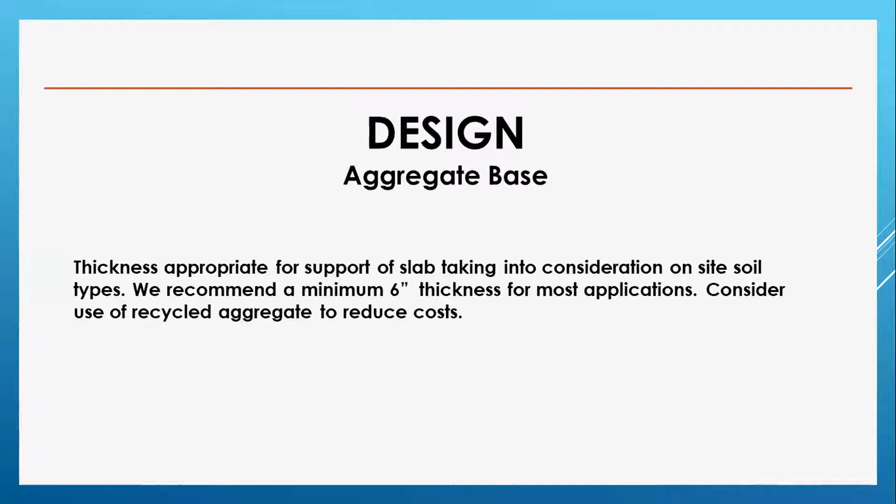Wanted to talk briefly about aggregate base. My take on aggregate base is we recommend a minimum of 6 inches under most applications. We recycle aggregate here at our facility, and so we promote the use of recycled aggregate. We actually install over 100,000 tons of recycled aggregate under our pavements every year, and we've never had one issue with warranties or failure from the aggregate base that we use.

Under drains in parking lots are huge. We're a firm believer in using under drains to keep the soils dry and the stone base dry. At a minimum, we'd like to see in design at least finger drains coming out of all drainage structures. It really helps after a rain event during construction—the site dries a lot faster. After the concrete or asphalt pavement's installed, it keeps the water from pooling around the drainage structures and keeps the stone base dry, free of water. So once we hit freezing temperatures in the winter, the pavement doesn't heave and shift around because of the freeze-thaw cycle. While you're designing parking lots, please keep in mind to include some under drains and under slab drainage.

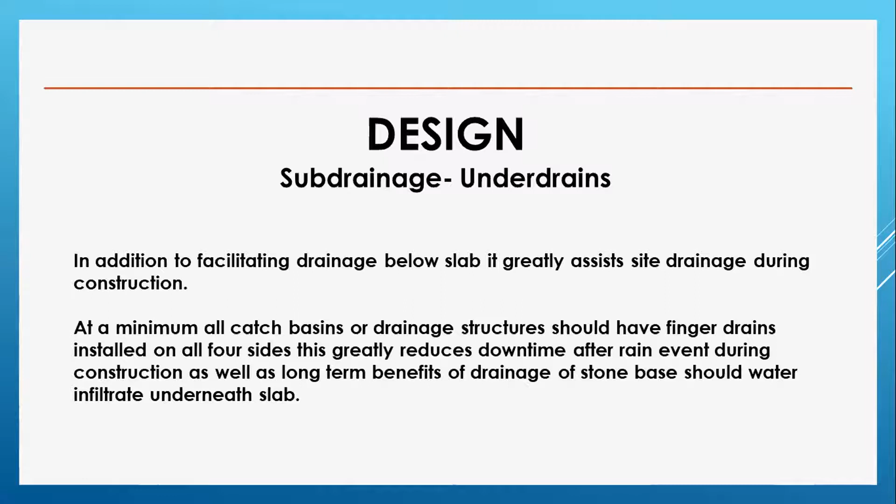Talk a little bit about reinforcement. As a contractor, we try, when we can, not to use wire mesh and rebar, for several reasons. Typically it's installed incorrectly because many contractors fail to use the chairs and slab bolsters to keep it at the right elevation in the slab or pavement assembly. It also adds cost during construction—when we use steel, we often have to pump the concrete into place, which adds additional cost. There's the time installing the steel, and working with the steel while installing is dangerous. Unloading it is dangerous, it gets bent up and deformed while we're moving it around the job site, and we have problems with steel sticking out of the slab because it's bent. The guys placing the concrete trip on the mesh and the rebar, causing a lot of injuries. So for safety reasons, we have to be very careful working with wire mesh and rebar.

We promote the use of fibers when we can and have really good success with macro fibers. We've used macro fibers in some really heavy duty applications, and we've had incredible results with them.

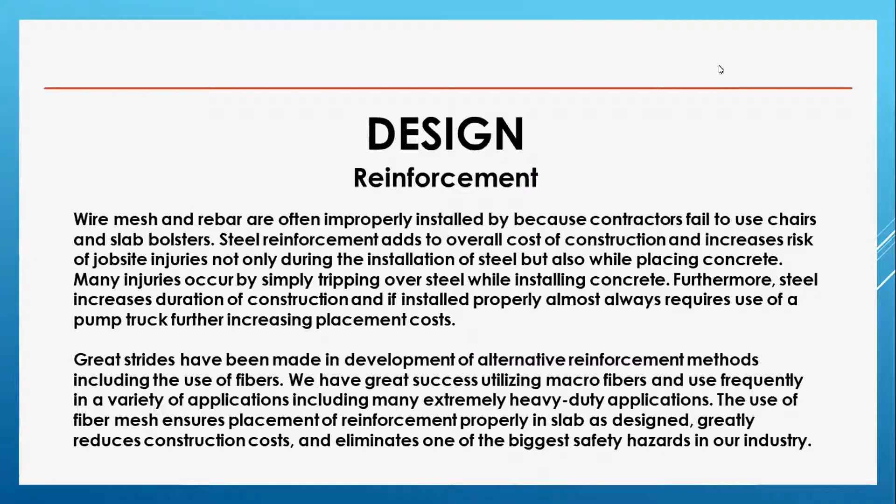Here's a picture of a parking lot we installed last year for Cuyahoga Valley National Park. It's actually an RV parking lot, and as you can see, we're utilizing a pump truck. We used 78-pound mesh on this project, chaired up about 6 inches into the slab, which was an 8-inch thick slab.

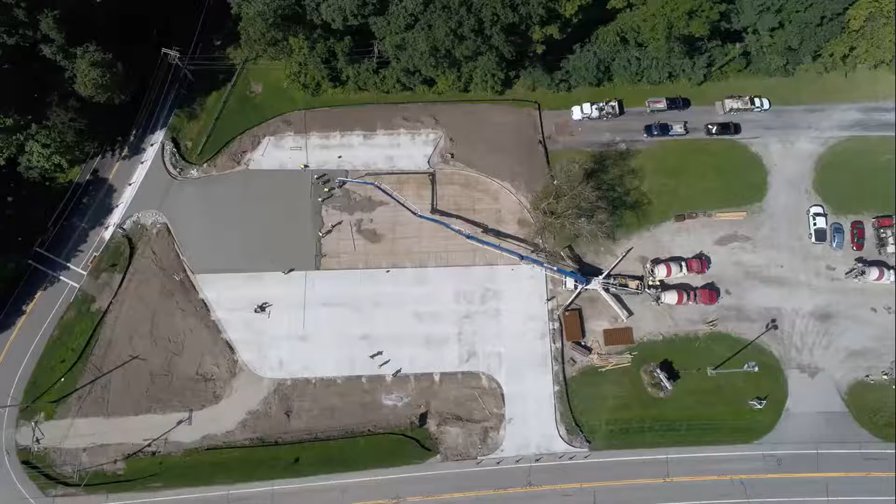Talking more about design and pavement grades, we're increasingly seeing parking lots and roads designed with not enough slope to facilitate drainage. Anytime you can get more than 2% slope, minimum 2% is what we need. We're imperfect as installers, and we have bull float marks and knee board marks, imperfections in the surface as we're finishing, and with less than 2% slope it makes it really hard for us not to have puddles and bird baths.

One of the most important things in recent years is ADA and path of travel requirements. This year, I'd venture to say we've done 25 to 30 retrofits to existing parking lots because the ADA parking spaces and the path of travel entering the building did not meet code, and there are litigious attorneys now running around businesses with levels trying to find when a business is out of compliance.

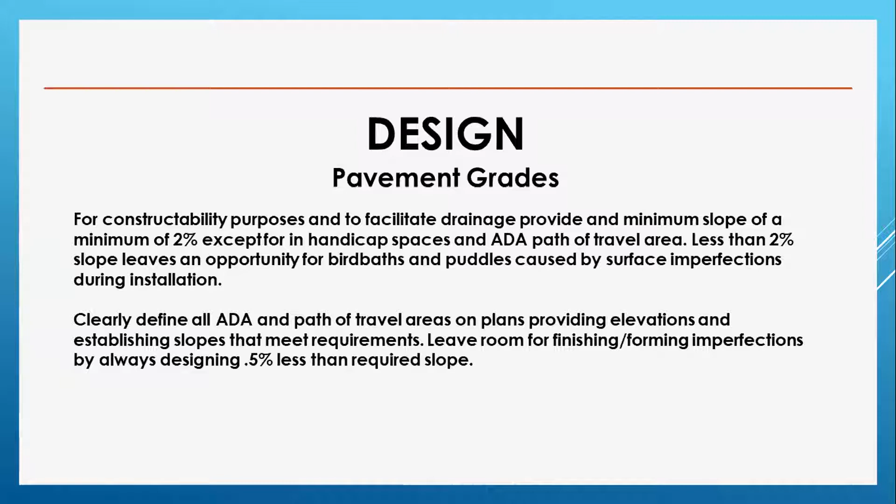So we typically, whether we design the parking lot ourselves or not, substitute concrete for asphalt in the ADA area. It's easier to hold the standards you need for elevations when pouring concrete there - straight edging from form to form, having time to set up your forms and double check the percent of slope in those areas.

It's really important for us as contractors that designers include a clear drawing detailing the handicap ADA areas, showing us the slopes and clearly defining those. This is a good example of a well-defined ADA area. So please, when designing parking lots, or if you have a project that isn't clear, get clarification from the designer - get a plan, a detail.

This drawing here is excellent. It leaves little room for error.

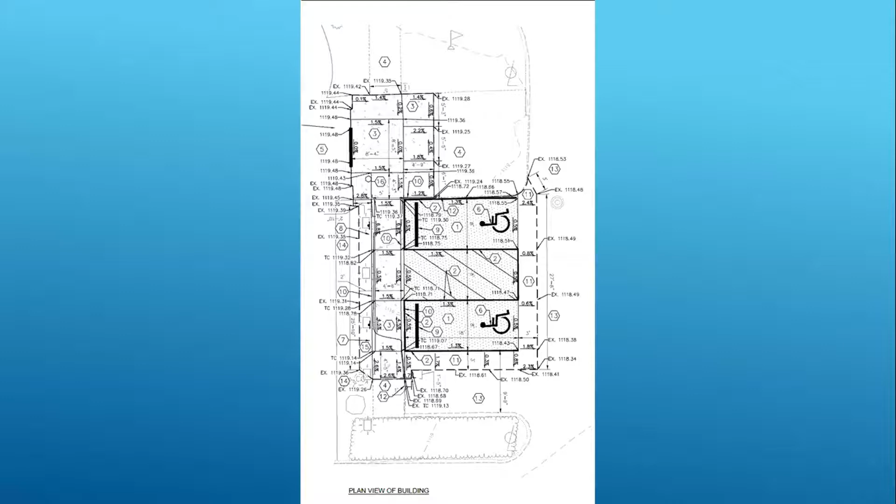One thing I wanted to talk about today - it helps save costs and improves efficiency and time while installing a parking lot. If curbs are desired or required, we really like to see the use of integral curbs in concrete parking lots. It helps reduce construction costs - you're only bringing one crew in, installing the curbs at the same time as the rest of the pavement, which really helps with time and costs.

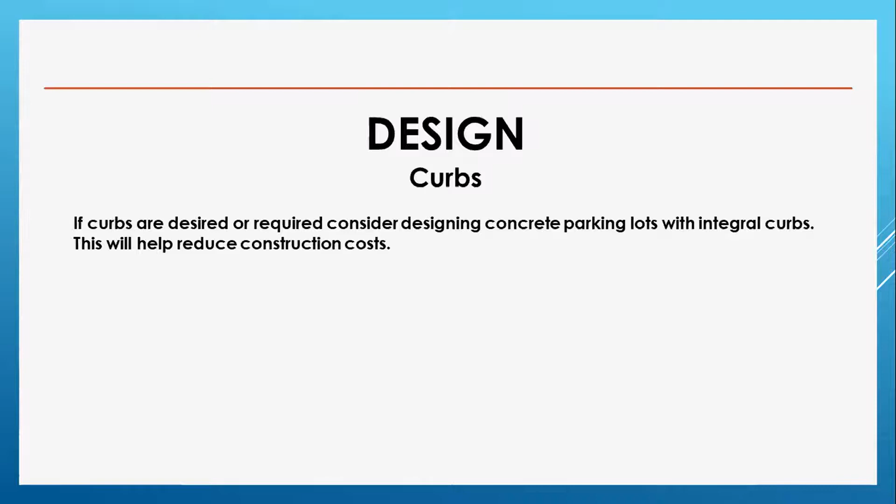Talking a bit about construction - as we start a project, we typically have it surveyed, then excavate the site to subgrade depth. Once excavated, we compact the soil and always engage a third-party testing inspection agency to evaluate a proof roll that we perform with a tandem axle truck, 60,000 pounds gross vehicle weight. For the proof roll, we roll it back and forth across the subgrade slowly and watch for deflection in the soils.

If it's unsuitable, we defer to the third-party testing agency for recommendations on how to remediate the soil. I always like to have the owner or an owner's representative on site during the proof roll, so they can witness for themselves if the soils aren't up to standard, and understand why there's additional cost involved to remediate the soils.

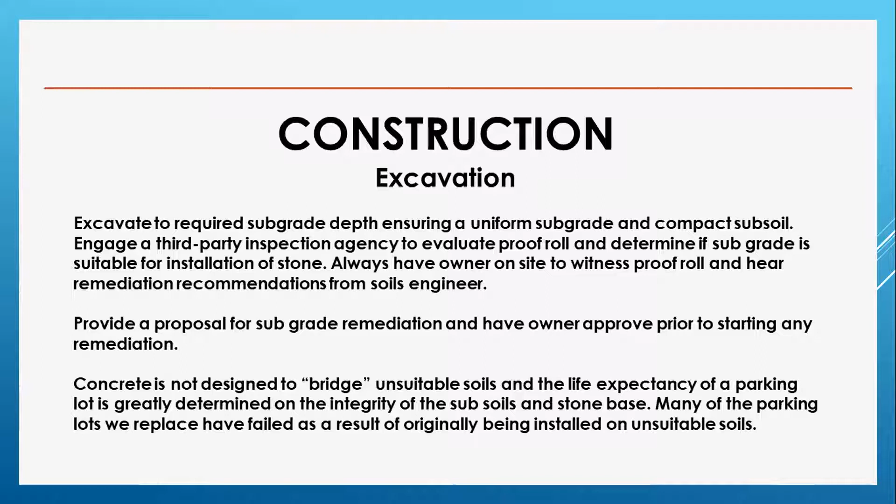One of the things that helps our company be so efficient with parking lots is our forming and prep. We put a lot of time and energy into the work before the crew shows up to install the concrete. We always double check our elevations, even double check the surveyor's elevations, and make sure we have enough slope for proper drainage. Again, we check the ADA areas and the path of travel time and time again.

To tell you how hard it is to meet that tolerance, I typically set our sidewalks up for 1.5% cross slope in the path of travel, and we set the forms at 1.5%. Recently I was on a job and I was checking behind the guy bull floating the sidewalk behind the straight edge, and just the simple act of bull floating the slab was enough to take it out of tolerance. Even though the forms were 1.5%, the dip in the bull float brought the cross slope to 2.25%. So it's really important to check, double check, triple check the forms.

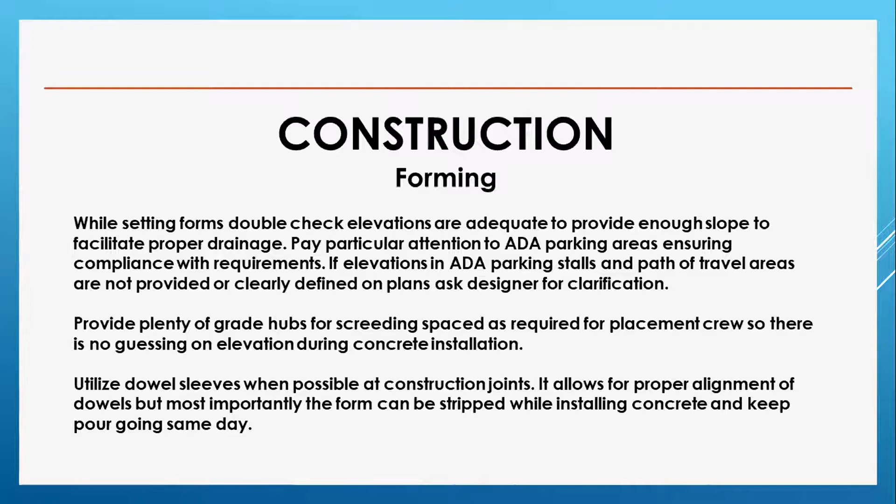We use dowel sleeves whenever possible at construction joints. They allow for the proper alignment of the dowels in the slab, but more importantly, we're able to strip those forms as we're pouring and keep installing concrete that day, so we can keep a continuous pour going. There's a picture of one of the types of dowel sleeves we use. You can see the dowel sleeves actually stay in the pour once we strip the form.

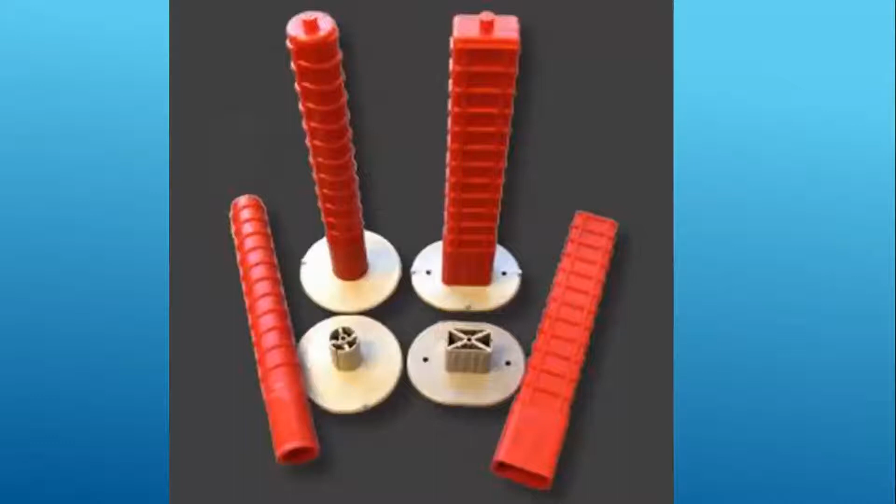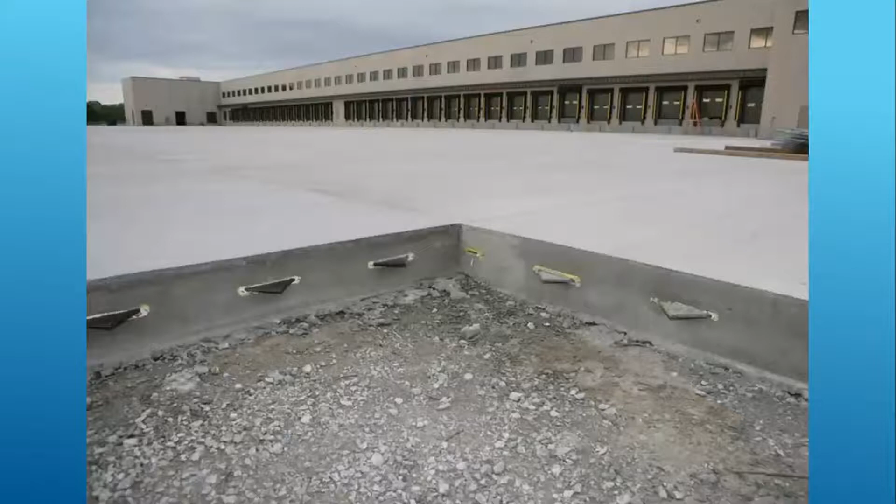The expansion joint that's showing there looks wavy, but it's actually recycled rubber. We like to use recycled rubber expansion joint. It doesn't rot away and leave a void, a big crack in the parking lot. Another picture, the base screws to the wood forms. And then again, the dowel sleeve itself stays in the concrete. These are called diamond dowels. We also use those, same concept.

Going back to the grade hubs, we like to space those out around 16 feet apart so that we can establish screed guides. We use a 3D laser screed often when we're installing parking lots, and we actually put a grade hub at all elevation breaks, peaks and valleys. I would say 25 foot apart when we use a laser screed. The laser screeds have a total station system. So they actually go out on site, set up their laser, and then go around and shoot the top of all the rebar grade hubs that we pound in the ground. Once that data is entered into their computer on the laser screed, we simply remove the grade hubs.

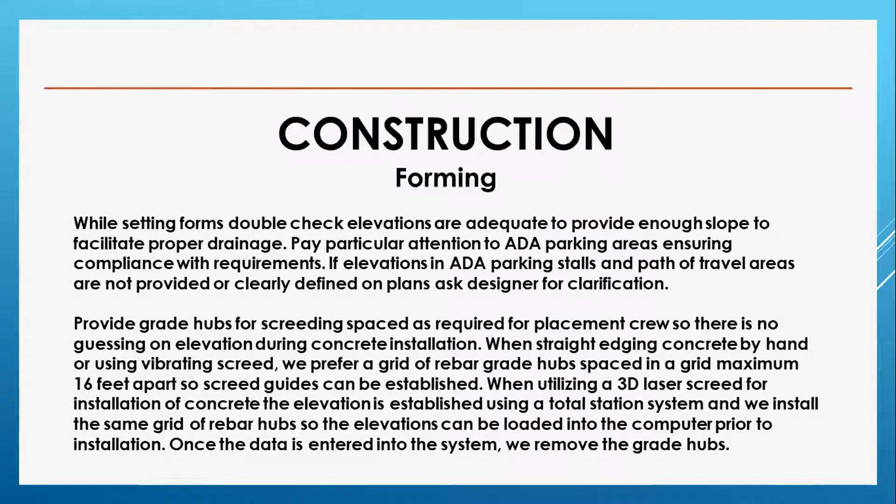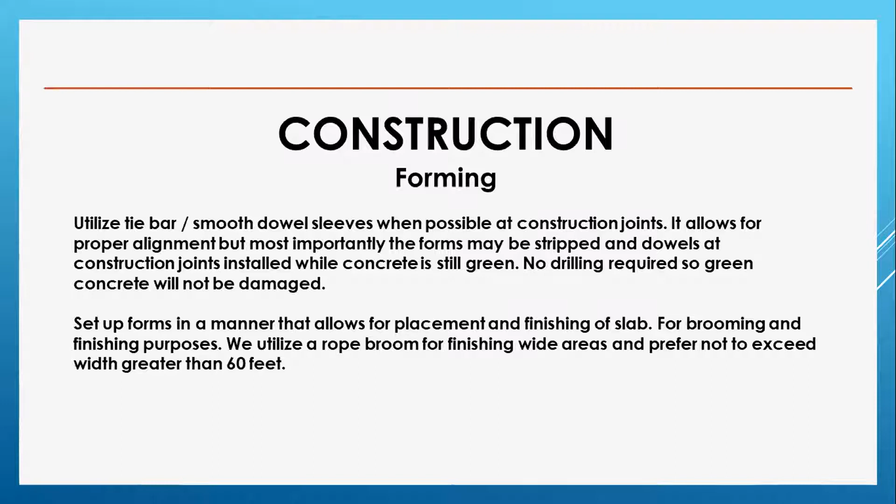One of the challenges as we're installing a concrete parking lot is that we need to keep the widths to, I would say, no greater than 60 feet. That allows us to place the concrete and keep from getting cold joints. It also allows us to finish the concrete. Any wider than 60 feet, it becomes really tough to get a broom finish on the concrete. We actually use a rope broom for finishing the concrete. We'll have two guys standing outside either edge of the pour, edging, bull floating, and pulling the rope broom across.

Communication with the ready mix supplier is one of the most key factors for a successful installation. It's actually key for our operations on a day-to-day basis. We're in constant communication with the ready mix producers every day, multiple times a day.

When you're planning a concrete pour, they need many days ahead, at least a week ahead of time. They need to know that pour is going to be happening and what day the pour is going to be happening. They need to know the quantity that you need that day, and they need to know your production rate.

For instance, if we're using a laser screed, I typically will place 90 to 100 cubic yards an hour. It's hard for a plant that typically produces 1,000 cubic yards a day to keep up. It almost takes every truck that they have, depending on the proximity to the pour, how far they're trucking it. So ahead of time, it's really important that we communicate with our ready mix producers.

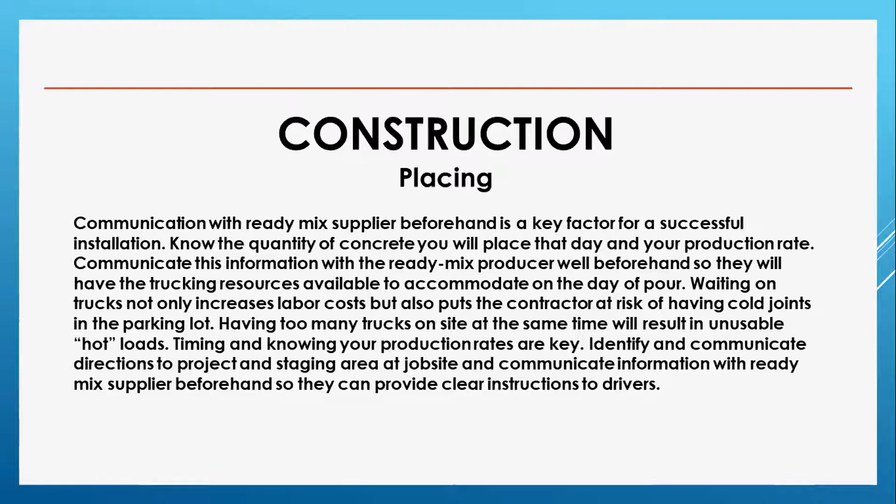Again, this was a smaller pour, smaller installation. It might have been a 220 to 250 cubic yard parking lot, but it took us approximately 4 to 6 hours to install, and we did it all by hand using vibrating screeds, and it went really smooth.

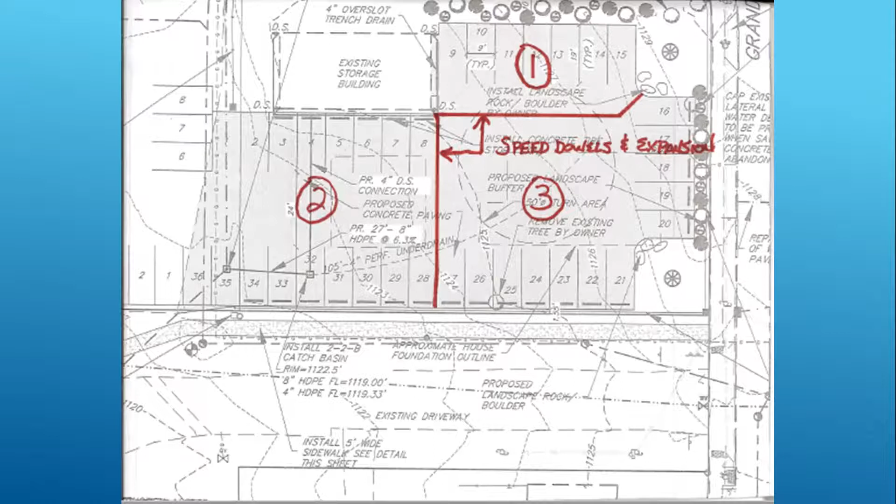You can see the form line for area 2 there. I can use your mouse. I don't know if that works. Oh, yeah.

There you can see the form line for area 2. We were able to start back here and work our way back down, and by the time we got to here, strip that form and insert our dowels.

We like to provide a really nice washout area. A lot of contractors don't think about this beforehand. It's really important to identify that area. You want to be able to get 2 trucks up to your washout at the same time. The quicker we get those trucks back on the road, the quicker they're back on your job with concrete. So it's very important to have an efficient washout area and keep those trucks moving.

You want to sequence the installation of the pour to allow for continuous installation. Again, we recommend 60 feet wide. We utilize super plasticizer on a daily basis to achieve workable slumps in lieu of adding additional water. If you're specifying projects, I recommend maybe even adding that to your specification, the use of super plasticizer to achieve slumps.

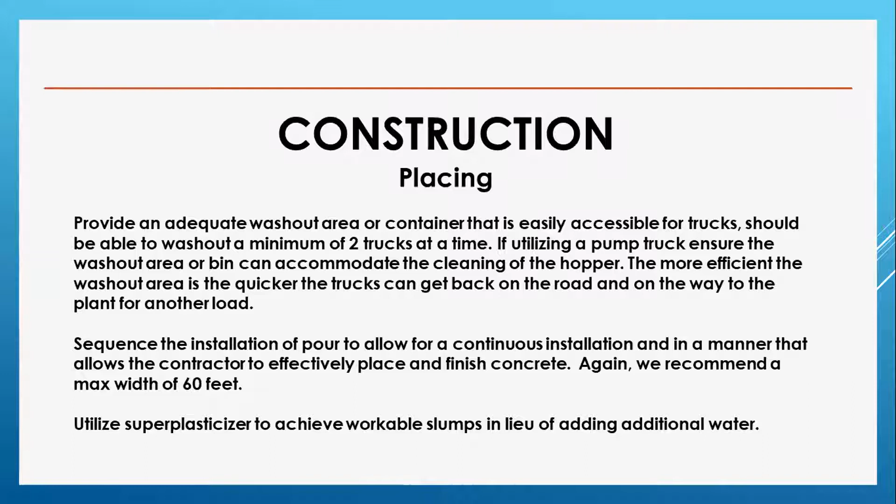Manpower. The worst thing you can possibly do when you're doing a large concrete install, that leads to some of the worst days of your life, is shorthanding your labor. You always want to plan for the worst case scenario and have your labor scheduled accordingly. We love to cure right behind our brooming operation, and we make sure that we provide adequate coverage of the cure. It's cheap insurance, very important for the longevity of the concrete.

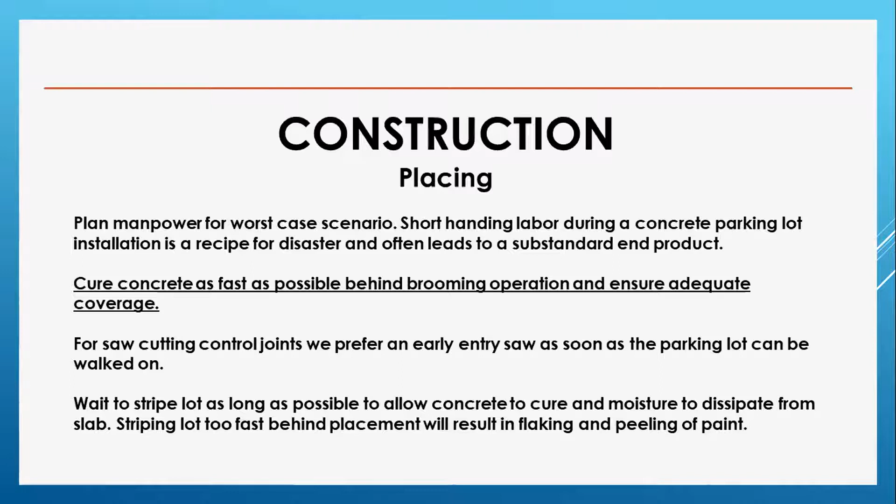We always use an early entry saw when we can in our pavement, and we get on it and start cutting it just as soon as we can walk on it. Waiting to stripe is sometimes hard to do because owners want immediate possession, but we encourage waiting as long as possible to stripe the concrete, allow it to cure and the moisture to dissipate from the slab so that the paint doesn't peel and flake prematurely. That's one of the issues that we actually see in concrete parking lots a lot, that they're often striped way too soon after the concrete's placed.

When Bob introduced me, he said our company is Perrin Asphalt and Concrete, and we do equal amounts of asphalt and concrete, and oftentimes I'm asked, why would you go with a concrete parking lot in lieu of asphalt? Isn't asphalt cheaper? Not necessarily. I would like to think that any lot 5,000 square feet or less is going to be definitely cheaper to do in concrete than it is asphalt. The cost of an asphalt paving equipment crew is probably around $1 million. The cost of equipment that we need to install a concrete parking lot is less than 50,000. Big difference in cost of equipment, overhead costs.

Parking lots, we're going to talk about integral curbs again. Parking lots that are designed to have curbs. If you can do a concrete parking lot with integral curbs, that saves not only grading time, it also saves time with the installation of the parking lot. Typically, if it's an asphalt parking lot and we install a 6x18 curb, you achieve subgrade, you install the stone for say your 6 inches of asphalt. So you would have to go back and excavate a slot for the installation of the curb. Then we'd bring a crew in and install the curb.

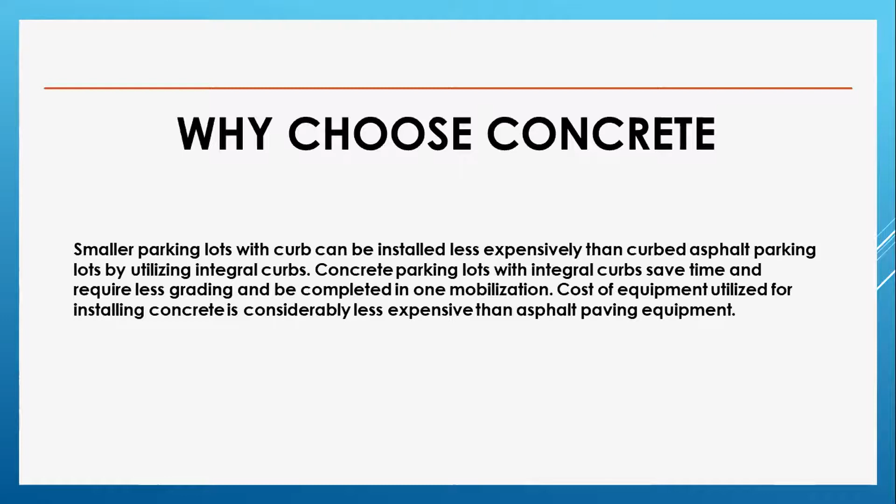Concrete's virtually maintenance free. We all know that it has a greater life cycle. Asphalt parking lots require maintenance, crack filling, seal coating, restriping. Asphalt parking lots are hot in the summer. They really produce a tremendous heat island effect. So a concrete parking lot actually decreases your cooling costs for the buildings, and concrete parking lots require less site lighting because they're brighter.

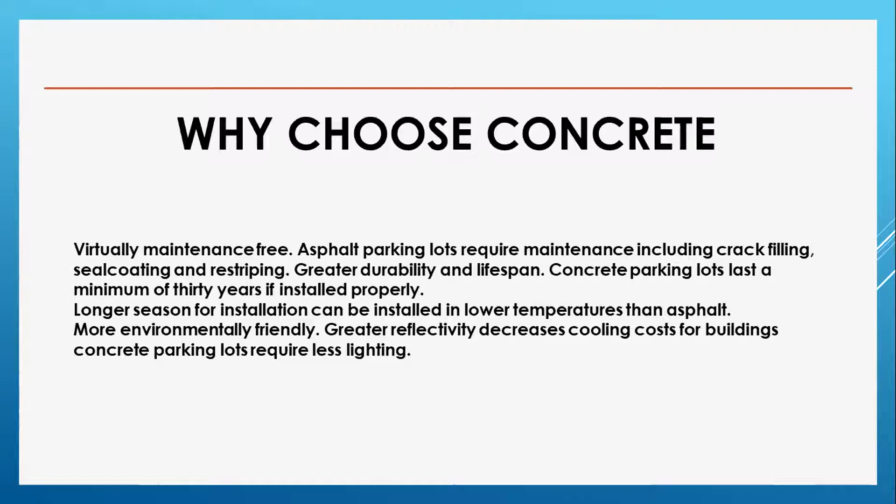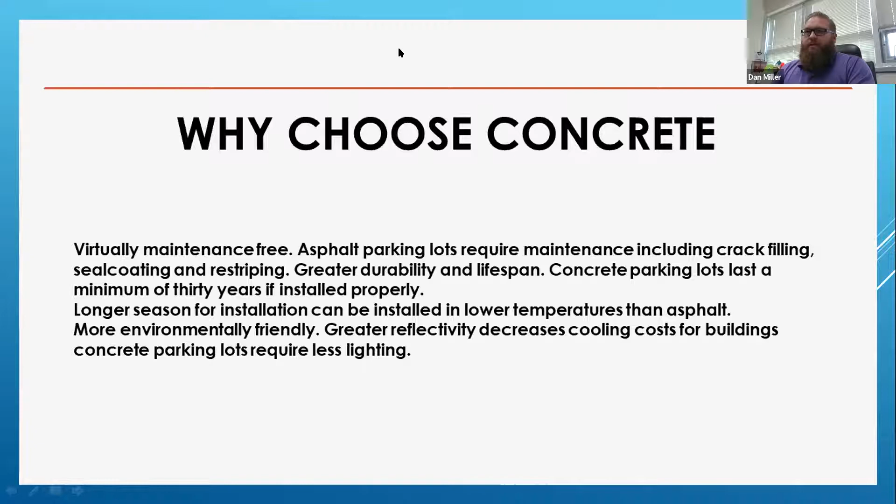Great, thanks, Wayne. Appreciate everybody here today for the webinar. Good presentation from Mr. Dan King there for pavements. For me today, what I'm going to touch on is ODOT specifications. Let me share that, sorry about that, wasn't fully sharing. Let's see.

So the specifications I'll touch on today are 451, 452, which is concrete pavement. I'll touch on aspects within 455, which is our quality control, quality assurance section. Got a few key details that I always like to touch on whenever I'm presenting a webinar or giving a talk of any sort. It's beneficial for everyone to see. Touch on some items within item 499, which is our ready-mix concrete, along with supplement 1126, which goes into the more important portion and aspects for the ready-mix supplier on how to obtain a JMF approval and what's required there.

And mainly for this topic, I'm going to touch on the self-consolidating concrete aspects there. Touch again on 499.05.D, the new spec for volumetric trucks and what we're going to allow with those. And then lastly, 705.29 for a spec item for fibers in concrete.

For 451 and 452, we do have the new mix designation, which is the QC1P. It does still have the 4,000 PSI compressive strength parameter with 2,000 or less coulombs of permeability using the AASHTO T277 test. In doing supplement 1126, this would require an AASHTO accredited lab and the ACI 301 over design of 5,200 PSI.

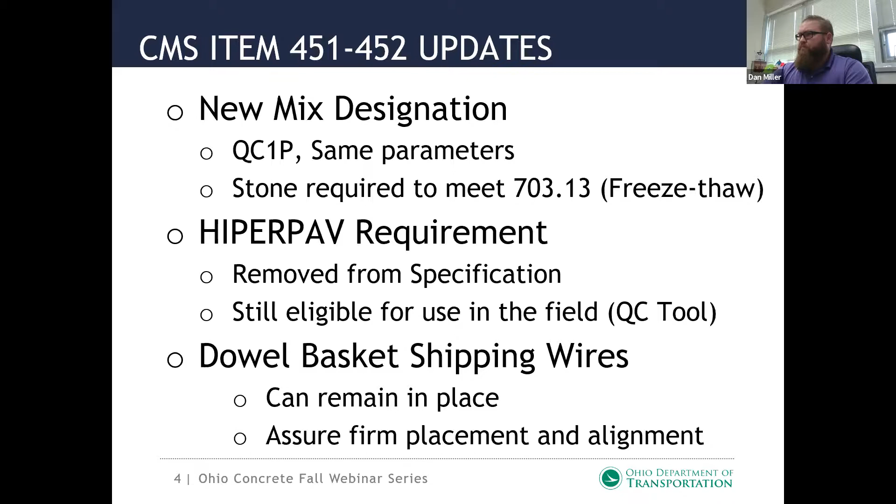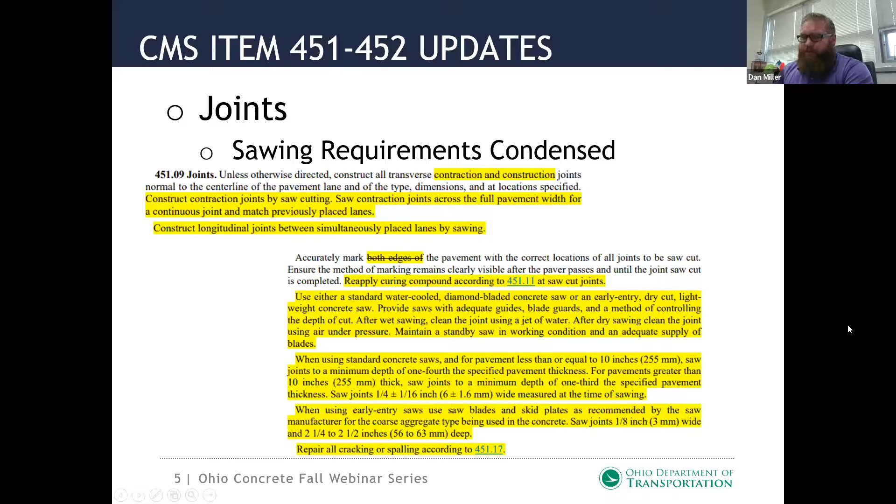There are still some minor details that were there, but instead of repeating the same language over and over again about what types of saws to use and what depths we need to cut to, we've brought that into one section. That way it makes it easier to read the specification, and we can keep going throughout the spec and capture different details. And for those printing the book, we're possibly making fewer pages, and sometimes they like that.

One item with this is currently in our specs, we do still require ASTM C143, the slump test. We highly recommend not going with the eyeball approach. If folks in the field decide to just eyeball this slump today and call it a 3-inch slump, that is honestly the best way to falsify something if we record that value. So I would recommend not doing that, as that may cause issues down the line that may involve the Federal Highway Administration coming out to do checks, and may lead to further actions if we find a lot of eyeballing. Please be mindful that the slump test is still required to be run by the contractor and also by the department.

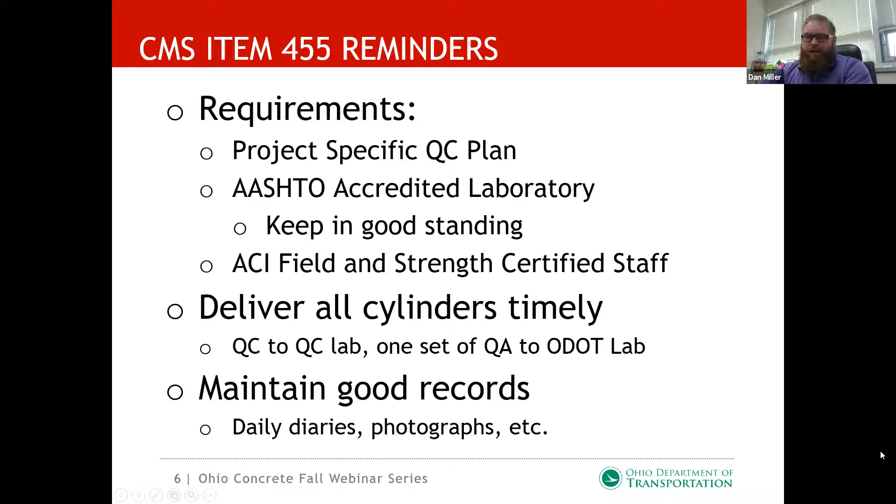CMS item 499, for the spec book 19, the QC1P update. We did also add our self-consolidating requirements. For the SCC, it is our 4,500 PSI, so it is similar to the QC2, with 1,500 coulombs or less for permeability. The main item for the aggregates, however, is it does not have to be well graded. It can be, but if you need a tighter tolerance for reinforcing steel, or there's a decorative feature such as trees or birds, or gentlemen or ladies riding in a canoe, whatever we can dream up with concrete, with SCC we can make it happen. We want to follow the guidance of ACI 237R for SCC requirements.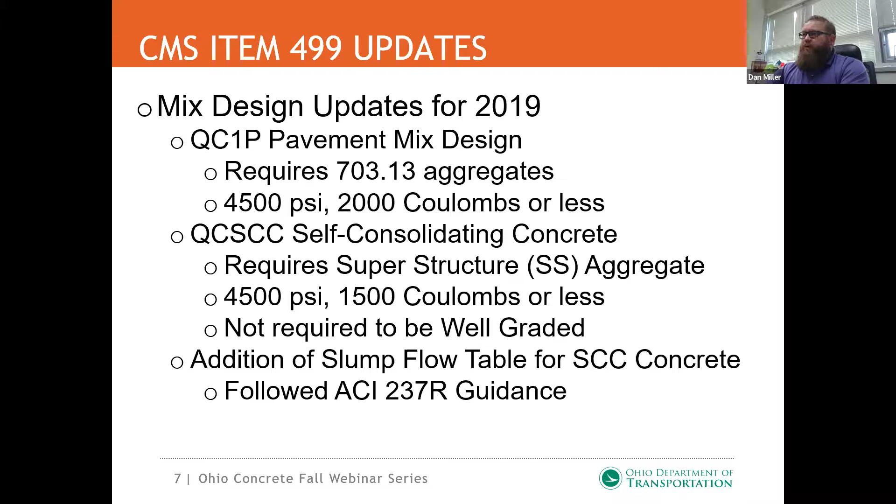We also have different requirements in 499 for the slump flow, with 3 different classes for the slump flow that can be called out by designers. It can be in plan notes, but hopefully designers can start to call these out with the different classes. There are some avenues that I've been addressed on from others in construction that we need to tie this into the spec a little bit more, into our 511 spec and other areas, as to where to use SCC and get the most benefit out of it. I think it's mainly for our decorative areas, for drilled shafts, and situations where we have tight reinforcement tolerances. It's currently used in precast, pre-stress, and concrete pipe industry with great success.

So hopefully we can start using it a little bit more in our day-to-day concrete placements.

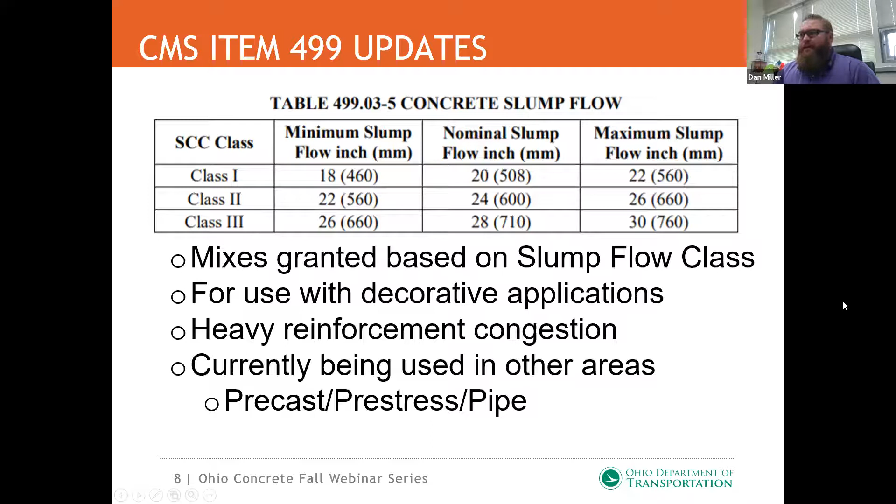For supplement 1126, we do have some different requirements that go along with the SCC mix design. Based on each slump flow, we do recommend having 3 different submittals. So if you want a class 1, a class 2, and a class 3 within your suite of mixes that you can provide to the department, we do ask for testing to be performed at each of those levels.

Testing includes the visual stability index, the J-ring, and also the static segregation test. We understand it's admixtures that are changing here. The recommendation is to go to class 3 and do your permeability and strength testing based on that, and then we can back down from those. The testing lab can provide data for the other 2 slump flow classes and submit that data.

Make sure to include in your test reports the aggregates that are being used, the cement that was used, and the batch weights being used. We need that information. We've been seeing some submittals lately where we're completely missing everything. All we're getting is strength test and permeability test data, and that's not enough to give us anything to verify what materials went into that testing at the lab.

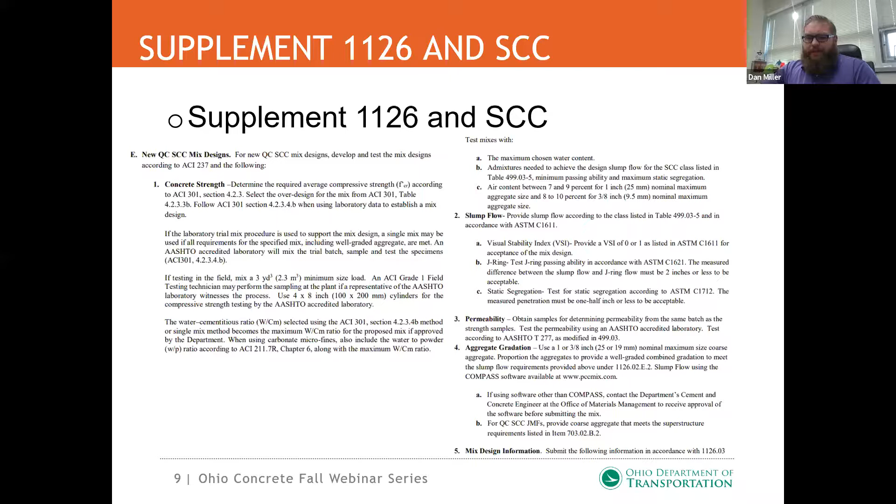So for SCC, when we're in the field, typically what we're going to do is the ASTM C1611 slump flow with the inverted slump cone. Again, we're looking for either a highly stable or a stable mix. We do not want to see an unstable or a highly unstable mix, as those would not be acceptable on the job site. We would need to either make adjustments or reject that load of SCC concrete due to it being too wet with too much bleed going on within the mix.

C1621 is the J-ring test. We want to make sure and perform that test as well for the passing ability and make sure it meets those parameters. Lastly, the C1712, which is the penetration test. You use the small apparatus, and prior to pulling your slump flow or even doing a completely separate test, you can stick the apparatus on top, set it gently on the concrete, let it stabilize, and then read the measurements off the gauge to determine your penetration.

Another test available, which precast and pre-stress folks are required to use and ready-mix needs to look at again, is C1610, the static segregation column. It does seem to be a cumbersome test from doing the ACI SCC certification program and trying to perform it, but it gives a good idea of your percent segregation between the top and the bottom of the mix. So it is a good mix verification tool.

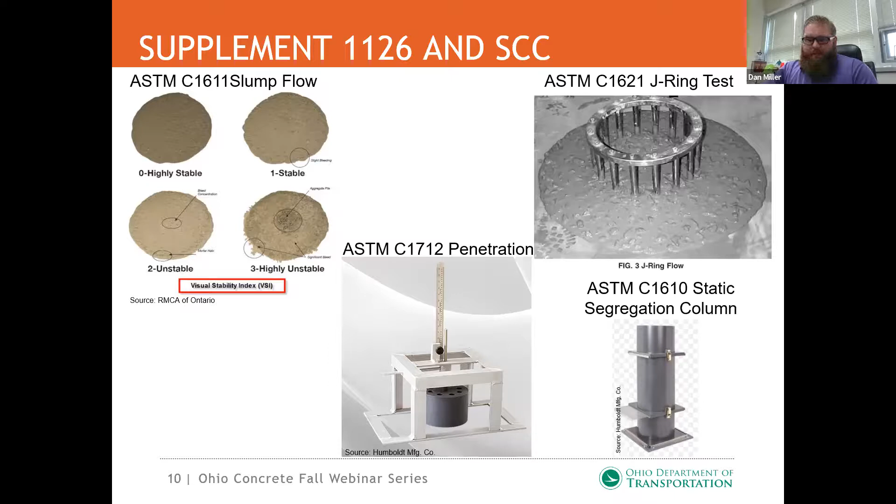We would not see this test, the 1610, performed on the job site ever - I can say that wholeheartedly. But we will ask for the slump flow test, and at this point that would be the only one. We haven't gone to the J-ring test in the field at this point. We've used it as a mix submittal tool for the time being.

Other updates within 499: again, we want to make sure not to exceed our water to cementitious or water to powder ratio at any time. For aggregate adjustments, if we're within 100 pounds, no approval is needed from the engineer, though it's still good to let them know you made an adjustment. If you're greater than 100 pounds, then you must provide a compass report and notify the engineer prior to use of that concrete. Do be mindful of that - we've had times where mixes show a lot of changes made, but there was no approval from the engineer prior to.

Some of that may be based on doing a slip form mix or a slip form barrier. In some avenues I've even recommended that we have a separate mix design to do a little better, rather than just pull out water and slug in sand for a new slip form barrier mix. Be mindful of that. If you feel you need a separate mix that will be more durable for everybody, then a new mix may be beneficial, with testing for that slip form application.

Addition of non-chloride accelerator. We're in that season right now where it may be possible to use that, but again, it is the responsibility of the engineer to give prior approval before use on site. Be mindful of that. I do get calls every now and again asking if we can do this, and I say it's up to the project engineer and what kind of temperatures we have. Are we 65 degrees during the day going down to 20 at night? Then it's probably going to be beneficial to have it in there. But again, that's up to the project engineer to decide.

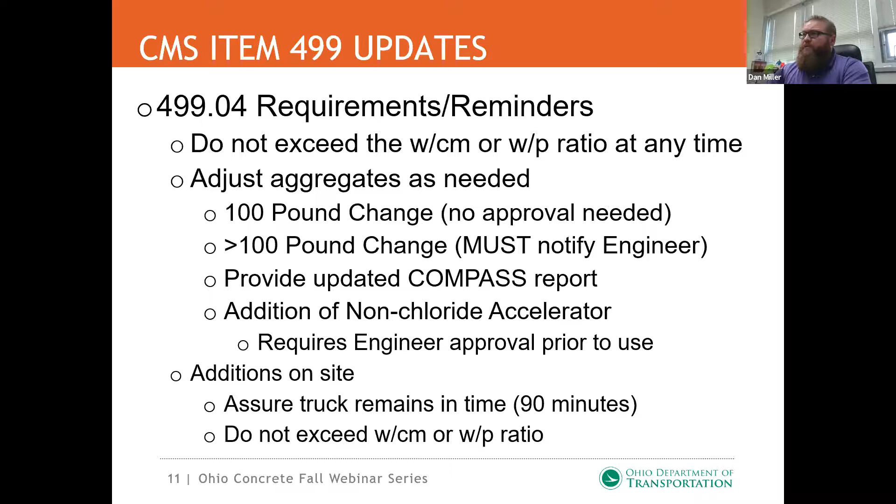In addition to the spec in 499.04, letter H, regarding slump loss, we can add F or G admixtures. There's even a possibility to add water, but we want to be cautious of that. The contractor and ready-mix supplier should be able to dial this in so we're not having large occurrences of water needing to be added due to slump loss prior to or during placement. But if that issue occurs and we have to add a little water, it's beneficial to notify the engineer, and we'll have to repull testing—pull a sample again and run slump to verify. It's best not to add water when backed up to the pump and unloading, but we understand that may happen. Hopefully we can dial that in and avoid those issues.

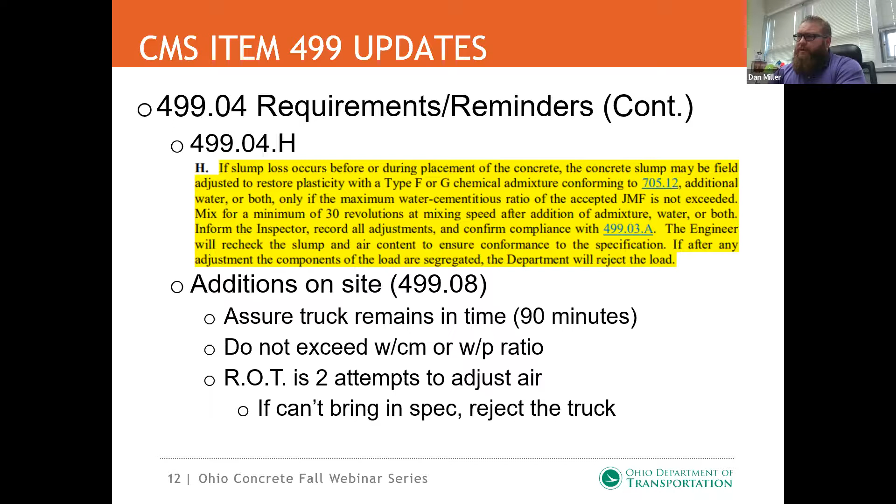Again, our rule of thumb is we can make two attempts to adjust air on site. If we can't bring it into spec, most likely we'll reject the truck, and again, make sure we're within our 90-minute time limit.

A new animal, volumetric trucks. They're not really new, we've used them on latex overlays and seen them in other avenues. So we did add them to the spec. They've been used in 847 and 848 applications using a latex overlay. Low strength mortar backfill seems to be a good avenue for these. Manhole and monument adjustments, and even miscellaneous and fast set mixes would be beneficial for volumetric trucks.

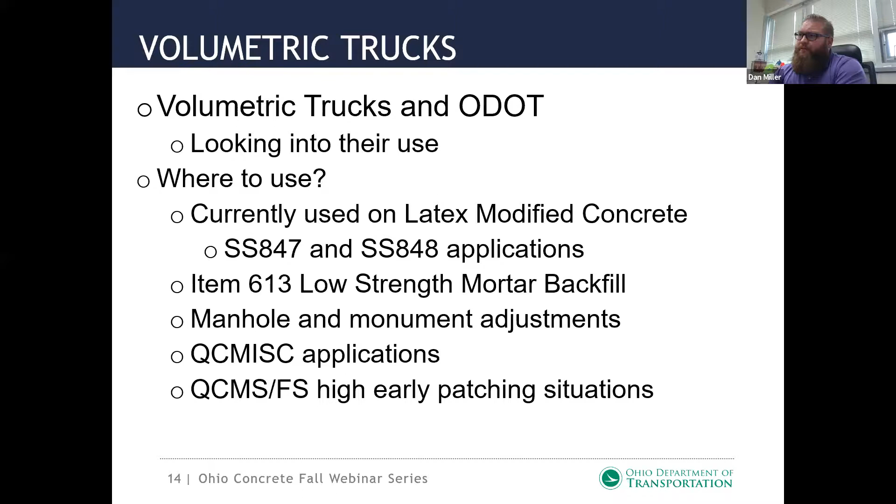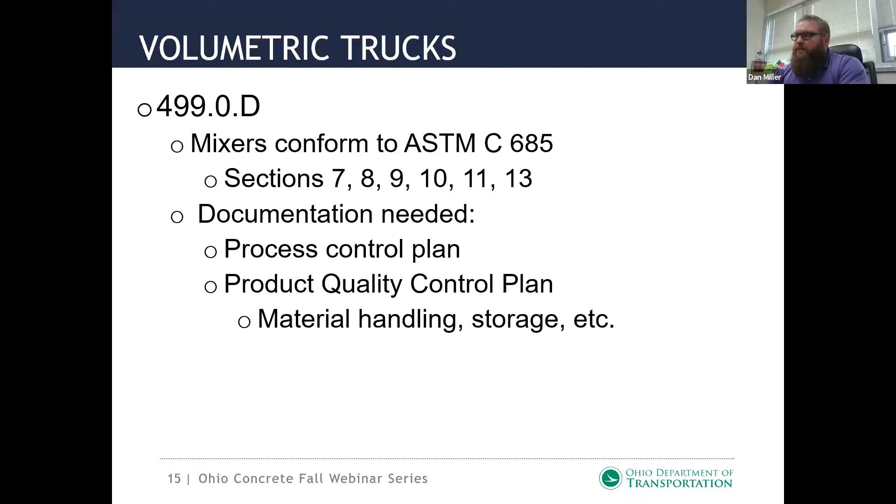When will the truck be required to be calibrated? Typically it's going to be a per-project item unless you're always using the same materials. Moisture adjustments still need to be followed in accordance with 499.06, and each truck will have to have the ODOT tags we've been putting on—basically like a little earring, I'll call it—using truck container tags with a serial number. So each truck will have a serial number that coincides with it when delivering concrete to an ODOT job.

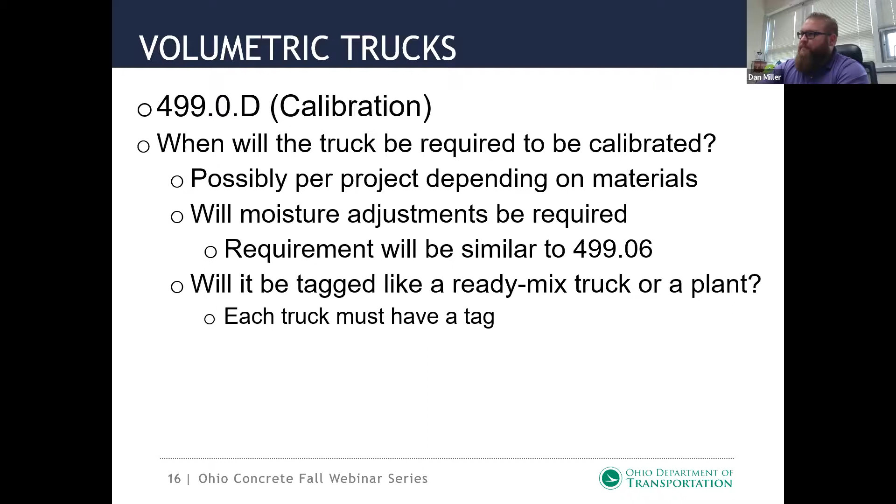Batching tolerances are slightly different than our regular batching tolerances for ready mix concrete. We can see those here: 0 to +4 for our cementitious materials, aggregates are ±2, water stays ±1, and chemical admixture stays at ±3.

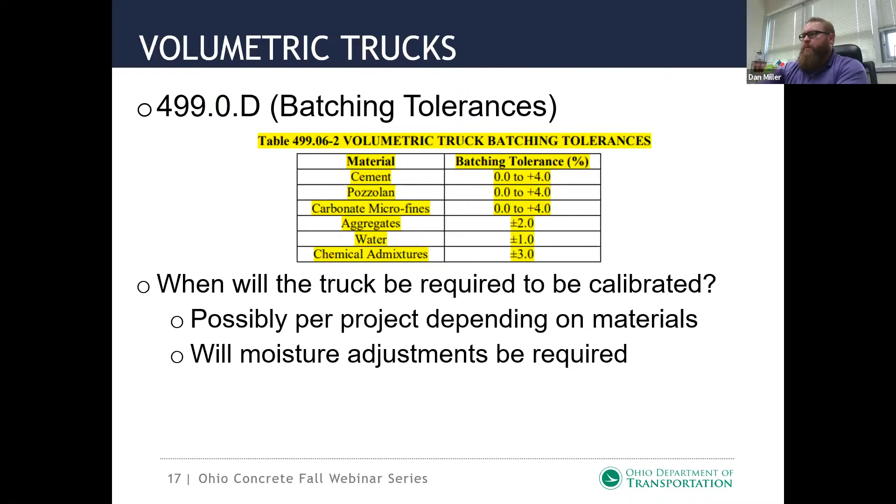And then lastly, our 705.29, we did add macro synthetic fibers for concrete. This was added in the July update of the ODOT CMS. We tried not to reinvent the wheel, so we basically went with following what Illinois Tollway, Illinois DOT, and the Indiana DOT have started. And we did follow their same guidance.

So in 705.29, you'll find the requirements from ASTM C1116 and ASTM D7508, with our exceptions listed for the aspect ratio, tensile breaking strength, modulus of elasticity, the length of the fibers, and then our dosage rate. So the dosage rate will be a minimum of 4 pounds per cubic yard.

And then we'll test the synthetic fibers in accordance with ASTM C1609 and C1579, making sure to utilize an AASHTO accredited laboratory for Portland cement and concrete materials, and make sure we meet the requirements within the table for the hardened concrete. So we're looking for our equivalent flexural strength ratio to be a minimum of 25%. And we need a minimum of 600 PSI flex at first crack.

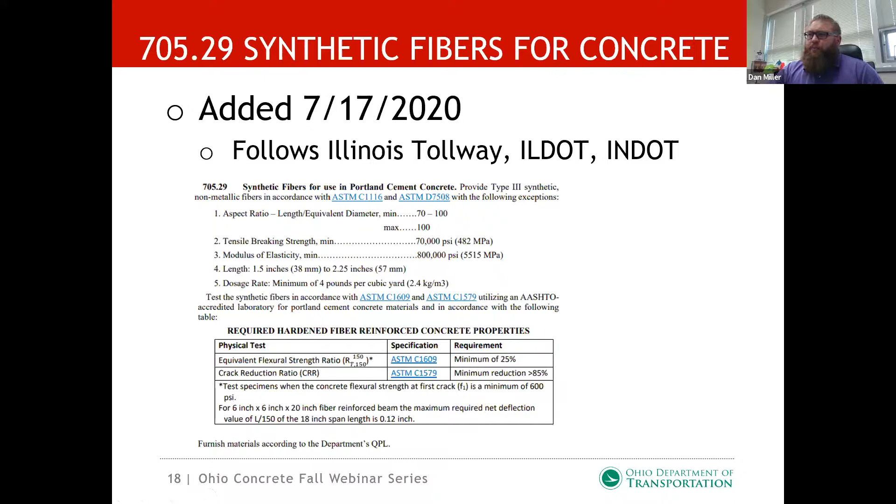Okay, so these are the parameters that we want to verify with the fibers, and then the fiber manufacturers can submit and will furnish according to the department's QPL. So from there, you can go to the QPL website. I did add, as you can see below, we've had it added to the QPL. Amir Tehrani, who's in my lab, he is responsible for the QPL list.

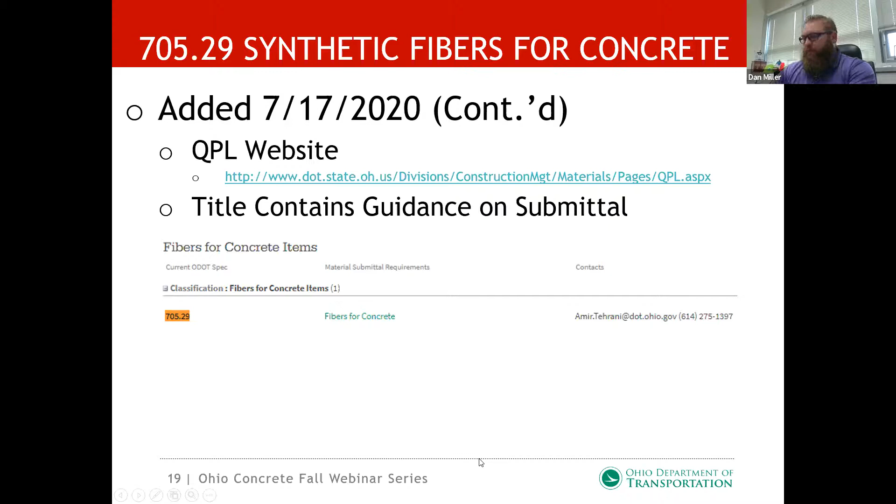And 705.29 is the fibers. That is where the listing of fibers is. And then the fibers for concrete title, that is where you find the guidance on how to submit and what documentation is required to submit the fibers for approval. And with that, I will take any questions.

All right, Dan, great. Thank you. Nice job. Got a few questions that came in. First one, what does ODOT think of recycled concrete for major repaving jobs?

So kind of a loaded question. I think it's something that we can do. We do have a supplement for that. Supplement 1117 does handle testing parameters and protocol currently when doing recycled concrete as aggregate for a concrete pavement or any other sort of recycled concrete, and it can be done.

With regards to recycled 304, I know we had done some previous research where we found tufa in the underdrains, and based on that research, there had been a moratorium on recycled concrete as 304. That being said, I think that's something that could be revisited with, I think that would be a partnership process between Ohio Concrete, ODOT, and the aggregate industry with OAIMA to meet and discuss what can be done there.

How could we do that? I think there is a market for that. I think there's a way that we could bring that back, or industry can bring that back around, and maybe we can change the spec a little bit or do more due diligence to determine where we need to go and what we can do.